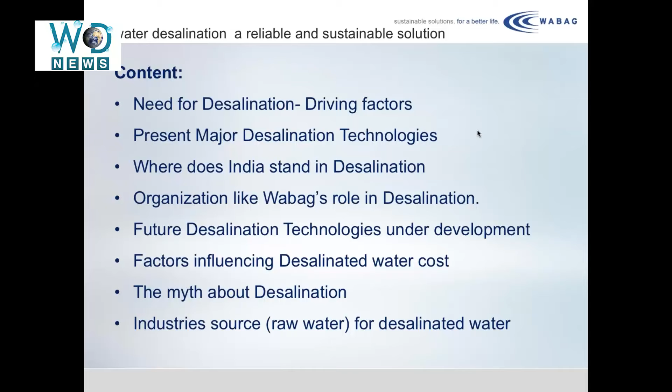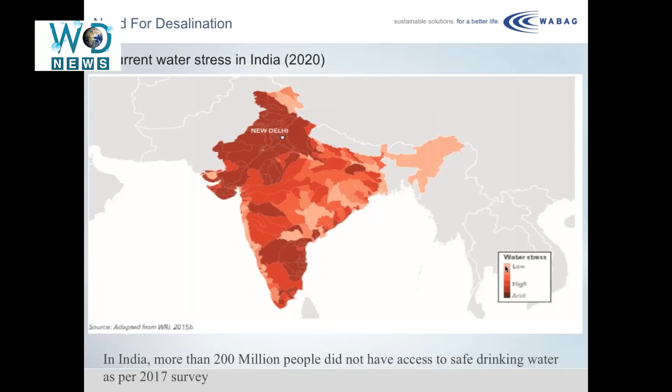More than 200 million people did not have access to safe drinking water by 2017 itself, which is now around 300 million. This picture shows the water stress in India in the current situation, that is 2020.

Factors driving the world towards seawater desalination include: limited freshwater resources, dwindling due to occupation and sharing with others; increasing contamination of freshwater sources due to pollution; increasing population consuming more water; migration of people to urban areas causing a lot of demand in major cities; and disputes on ownership of source water. For example, a dispute between India and Pakistan, or Mexico and USA, regarding water distribution from rivers is also increasing the need for desalination.

Higher disposable income of people in developing economies means they can afford to pay more for water even if good water is available at a higher price. This is also driving desalination. A high rate of industrial growth also increases the demand for desalinated water.

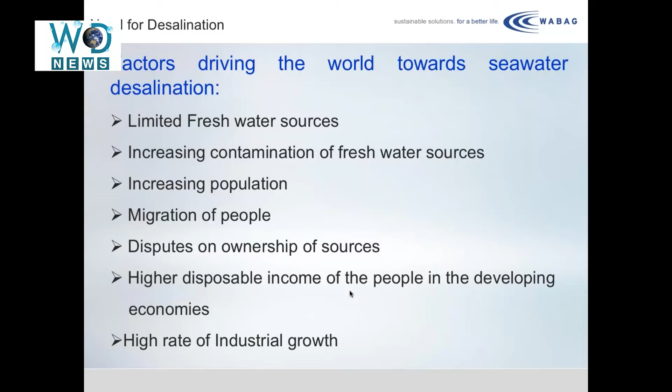The main factor that is driving the world towards seawater desalination is desalinated water costs going down continuously. In 1980, the water cost was around $3.2 per meter cube, that is 1,000 liters was costing around 3.2 US dollars, and it has come down gradually.

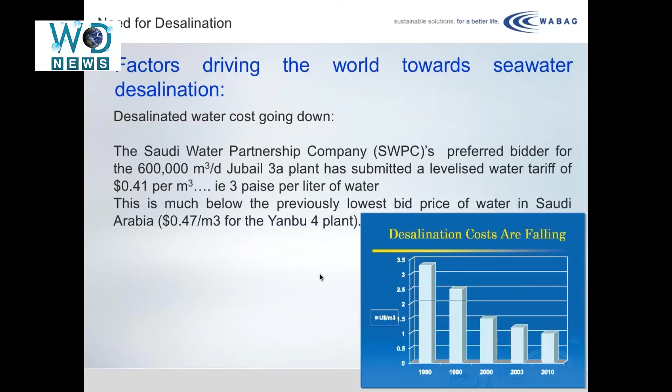Recent tender documents floated by Saudi water company SWPC brought down the water cost to $0.41 per meter cube, that is 3 paise per liter. Previously, 6 months back, another tender had the price at 0.47 US dollars per meter cube for the Yanbu 4 plant. But the Jubail 3A plant, for 600,000 meter cube per day capacity, brought the water cost down to 3 paise per liter. This is making desalination a more attractive solution.

About 50% of world population lives around cities close to the coastline, so the sea is easily accessible, and the ocean is a sustainable raw water source. About 71% of the earth's surface is water covered, and the ocean holds 96.5% of the earth's water. So this non-diminishing resource makes desalinated water easily accessible.

Tightening of regulation of groundwater extraction for industries is also driving desalination. People in all continents have already accepted this water for drinking and utility applications.

Desalination is now a mature technology that can supply desired quality of water reliably and at affordable price. Desired quality of water means, with desalination plants, we can even develop water very close to 2 microsiemens per centimeter, or produce utility water meeting whatever requirement. So the technology is now flexible, and we can have a desired quality of water, especially with respect to seawater reverse osmosis. Multiple modular units can be added in stages in order to improve the water quality.

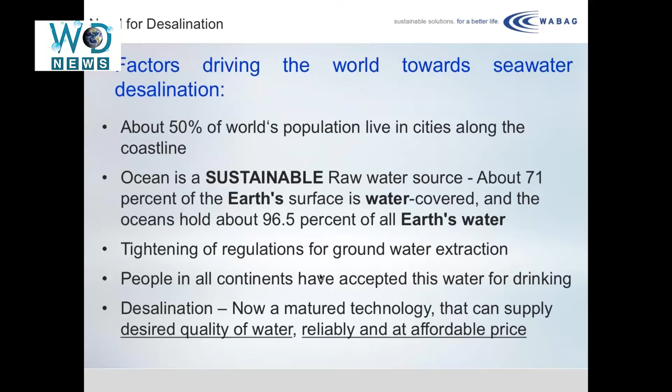Present major desalination technologies related to salinity of feed water are shown here. With the lowest feed water quality, you can go for ion exchange or electrodialysis process. Then there is brackish water RO, similar to the RO units used in kitchens. And there are seawater reverse osmosis plants designed for a TDS of water between 10,000 to 50,000. There is a limitation in the seawater reverse osmosis system because above 50,000, the pressure required increases above 85 bar. So membranes are not available except from one manufacturer which designs membranes up to 100 bars pressure, used in brine water conversions.

And the last is the distillation system, which is suitable for even higher TDS of water, and this was the most commonly used technology even 40-50 years back. But after the invention of membranes and making it more competitive, desalination technology with seawater reverse osmosis is taking over the thermal process.

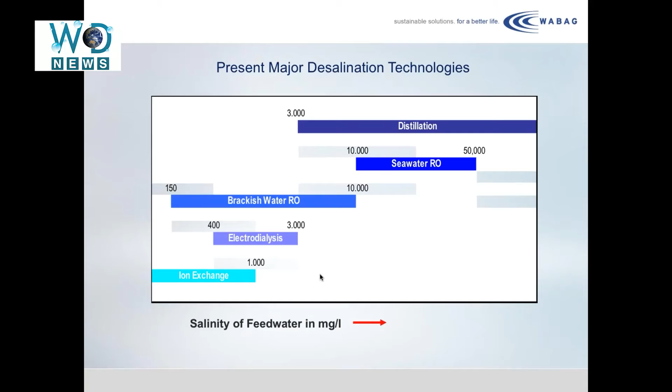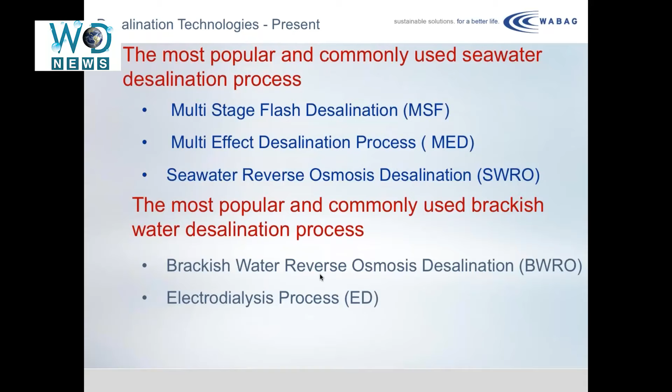The most popular processes in seawater desalination are the MSF process, which is multi-stage flash desalination, the second is multi-effect desalination process, and third is the seawater reverse osmosis desalination process. They are shortly called MSF, MED, and SWRO. For brackish water plants, which use well water or water with low TDS, brackish water reverse osmosis or electrodialysis process were very commonly used.

Any desalination plant has 5 major systems. One is the intake system, whose function is to bring water from the source up to the desalination plant. The second is the pretreatment system, whose function is to make this raw water suitable to be admitted into the RO system or any desalination system.

The pretreatment system assumes more importance in case of a reverse osmosis plant because membranes have pores which are very, very small, like 0.001 microns. So any particles going through can block the pores, even bacteria or viruses can block them, or biofouling and scaling can happen. So the pretreatment system assumes more importance in case of a seawater reverse osmosis plant.

Thermal plants are more rugged and can handle a less efficient pre-treatment system. Also, the pre-treatment system is important when the water quality is very bad. When the water quality is bad, the pre-treatment has to do extra work in order to remove all the impurities and make it suitable to be admitted into the RO plant, meeting the requirements of membrane suppliers.

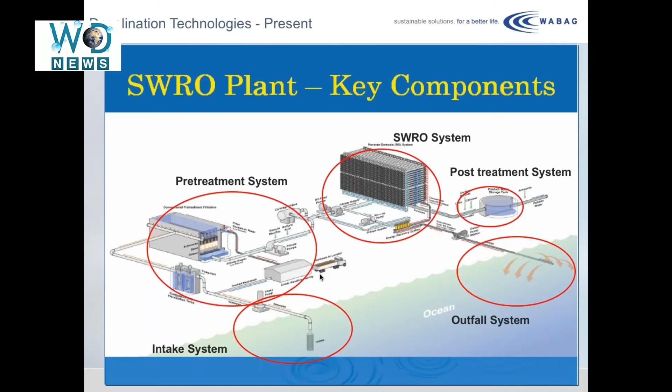The SWRO shown here can be replaced by any other desalination technology, such as the multi-stage flash process. The salient feature of this process is that the production of vapor is by means of flashing the seawater into evaporator zones, which are maintained at low pressure.

When water at a particular temperature, say from 90 to 110 degrees, is taken into an evaporator and allowed to flash at a lower pressure, in that vacuum the vapor generated is taken up and then condensed. This repeated flashing occurs in multiple stages by maintaining the succeeding stages at a lower pressure than the preceding stages. That means if the first stage has a pressure of X, the pressure in the next stage will be X minus something, and modern plants have up to 35 to 36 stages.

The more the number of stages, the higher the efficiency, or gain output ratio, and the lower the specific heat consumption. The water vapor generated is condensed by the water passing through the tubes, and in the process, the seawater passing through the tubes also gets heated. I'll explain the flow diagram in the next slide.

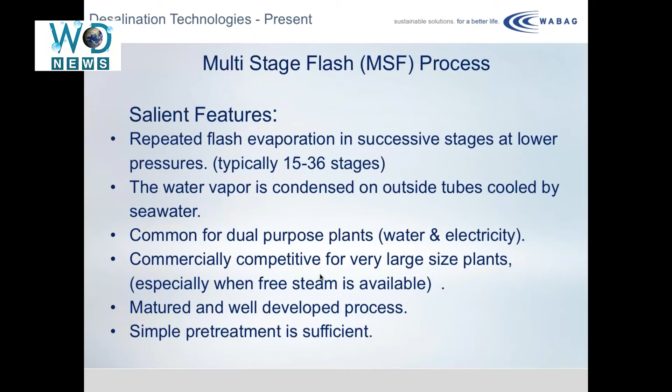We can see this is a simple flow diagram of a typical MSF plant. First, let us take the condenser. The feed water from the sea is pumped through the feed water pump, shown in the green lines, and taken through the tubes, which cool the vapor and condense it into water. This water is called distillate, and it is taken out. The water that is heated is taken up, and part of this water is drawn as makeup water, while most of the water is returned back to the sea. This is shown in the green colored portion.

The makeup water mixes with the recirculated brine and passes through various stages in the heating coils. These coils, in the process of cooling the vapors generated in different stages, produce vapor, condense the vapor, and in the process the water gets heated. In each stage it gains around 2 to 3 degrees centigrade, finally reaching the brine heater, where it is heated by steam coming from the thermal plant or standalone desalination plant, supplied by means of a boiler. The steam heats the water to a temperature we call the top brine temperature, normally in the range of 90 to 110 degrees, and in some plants up to 135 degrees. The condensed steam is collected and returned back to the boiler for further processing. It is a closed loop arrangement.

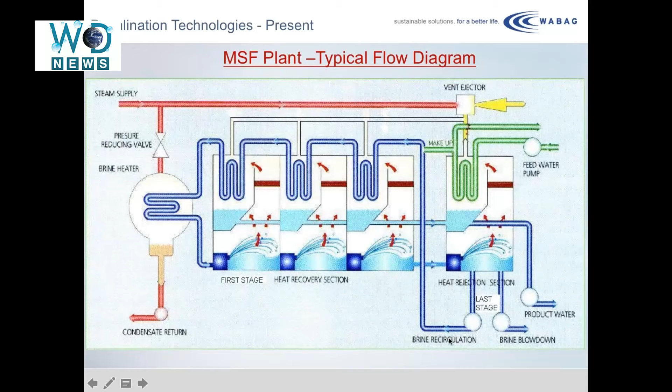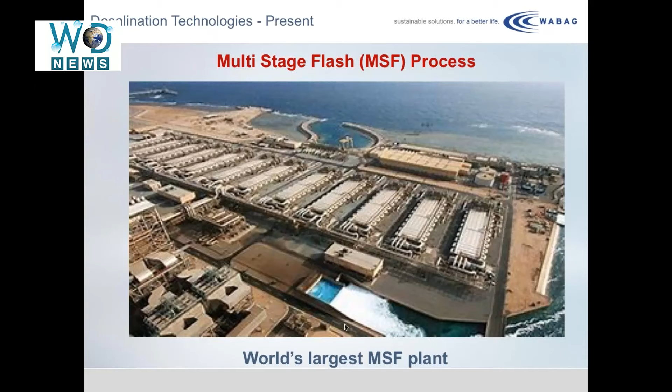This shows the Ras Al Khair plant, a 1 million meter cube plant, which I mentioned, where the MSF process generates 700,000 meter cube per day of water. It is in Saudi Arabia.

The next technology is the multi-effect desalination process. The salient feature here is that, in contrast to the MSF process where flashing generates the vapor, here film boiling generates the vapor required for desalination. In MED plants, the number of stages is less compared to MSF plants, generally 6 to 8 stages in modern high capacity plants. Initial plants had only 2 or 3 stages, where the efficiency of conversion was much lower, and the GOR and specific heat consumption were slightly higher. The more the stages, the better the efficiency of the plant.

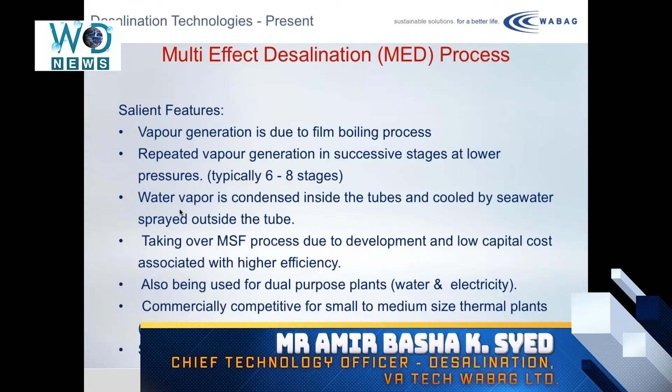The vapor generated is condensed inside the tube by spray of water coming out, cooling the seawater, which is sprayed outside the tubes. This process is gaining more importance because, price-wise and total cost-wise, as well as efficiency-wise, it is slightly better due to the lower number of stages. In small capacities up to 400,000, it is gradually replacing the MSF process.

It is also similar to the MSF process used in dual purpose plants, where waste heat from the power boilers or extraction steam from the power boilers supplies the heat for the brine heater, or to heat the seawater entering the system. This is commercially competitive for small capacity, but nowadays MED processes are available for 350,000 to 400,000 meter cube per day units, and it also requires only a simple pre-treatment process.

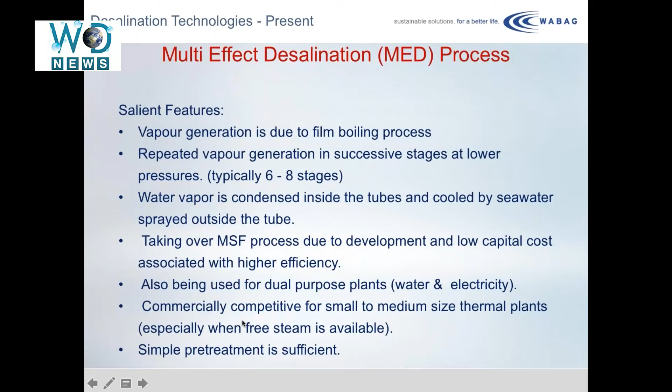The next slide shows the MED TVC, thermal vapor compression flow diagram. Here the steam enters and creates the vacuum required for the whole process. The vacuum is generated by means of an ejector system. The steam passes through the ejector, and then enters into the first evaporator stage.

It passes through the tubes. You can see the steam coming out, entering in as red, turning orange, and entering into the tubes. The vapor going inside is cooled by the seawater that is sprayed into the stage. During the process it cools the vapor and condenses it. This condensed water from the steam in the first stage is high purity water, and it can be returned back to the boilers for the process. During this evaporation, film boiling takes place over the tube surfaces, and vapor is generated.

The vapor generated goes to the next stage, shown by the red arrows. In the next stage, this vapor flows through the tubes, and water is sprayed externally to the tubes. In the process, new vapor is generated and goes to the next stage, while the vapor flowing inside the tube gets condensed and collected. The condensed water is collected and taken to the last stage as distillate, and the water sprayed is also collected at the bottom and taken to the last stage. Part of the water is recirculated for the process, and the remaining is blown down completely.

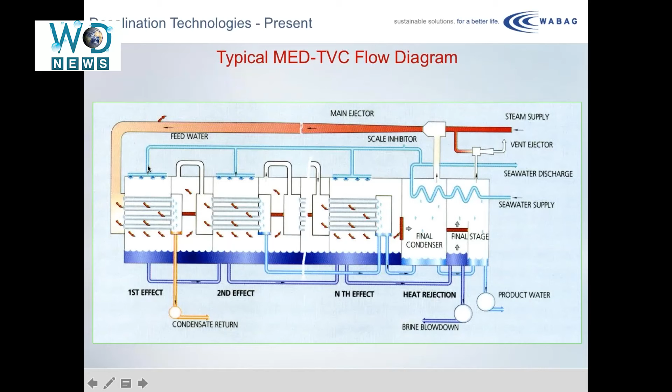The most commonly used process, which is gaining more importance in recent times, is seawater reverse osmosis. This is the cheapest desalination process for any standalone desalination plants.

In MSF and MED processes, if you convert the heat energy supplied into electrical energy, the power consumption will be very, very high, in the range of around 38 to 40 kilowatt hour per meter cube. But in seawater reverse osmosis plants, the specific power consumption has been brought down close to 3 to 3.2 kilowatt hour per meter cube, depending upon the simplicity of the process.

It's a cold process. Seawater reverse osmosis is a cold process, and uses pressure energy for desalination through reverse osmosis. This is very commercially competitive for all sizes of plants because it can be modular and added on to existing ones to increase capacity.

It is also a quick start and quick shutdown process, because in thermal processes you have to generate the vacuum, allowing steam or water to pass through the ejector to create the vacuum required in the system. Also, the heating rate and cooling rate in the boilers and other things are limited, which restricts the startup to a slow timing and a slow shutdown time for a thermal desalination system. Whereas in a reverse osmosis plant, the plant can be started within 15 minutes. An individual RO unit can reach full capacity easily, and shutdown can be done instantaneously just by a trip, then flushed and made ready for the next startup operation. So it is very suitable for quick startup and shutdown applications.

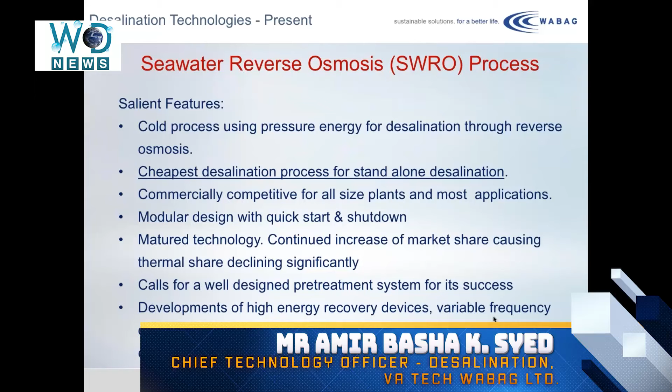This technology calls for a well-designed pretreatment system because of the fine pore size available in the membranes and because of the high recovery in this plant when compared to thermal plants. We go in for 40 to 50% recovery, and because of that, the scaling potential is also high, which needs pretreatment to be done properly.

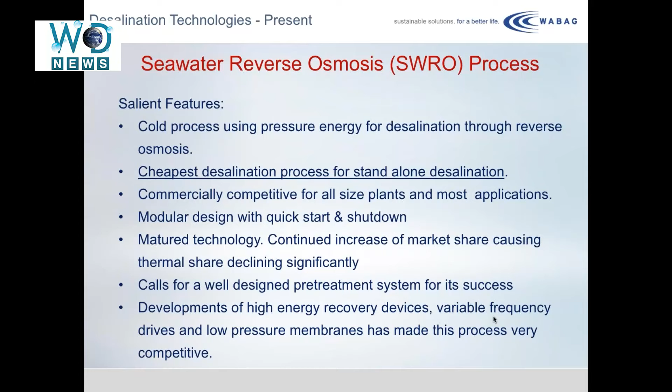Development of high energy recovery devices, variable frequency drives usage, and low pressure membranes has made this process a very competitive process.

Most of you will know what is osmosis and reverse osmosis. Just to touch upon osmosis: if you have a semi-permeable membrane with fresh water on one side and salt water on the other, water molecules from the fresh water pass through to dilute the salt water due to the concentration difference. Because of this, the water level rises on one side and goes down on the other, as part of the water molecules pass through. When the water level reaches a certain height, the process reaches equilibrium where exchange of water and salt takes place.

The level difference is called osmotic pressure. Only when you overcome this osmotic pressure in a reverse osmosis process can you produce fresh water by passing water molecules through the semi-permeable membrane. So in the osmotic process, due to the concentration difference, water molecules pass through the semi-permeable membrane and dilute the salt water. In reverse osmosis, you apply a pressure much higher than the osmotic pressure to force water molecules to pass through the pores in the semi-permeable membrane and reach the other side to produce low salinity water.

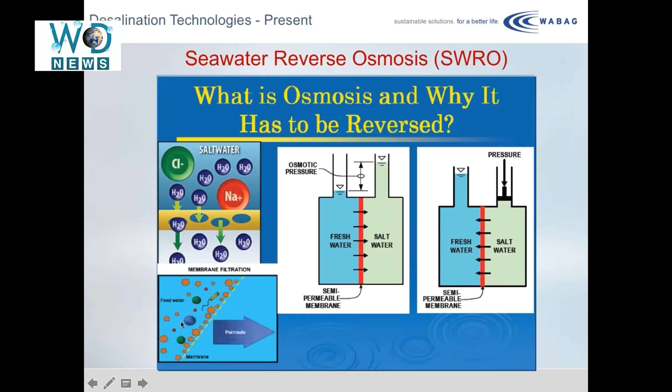This is a simple flow diagram of a seawater reverse osmosis system. Seawater is taken into the feed tank, then pumped through a feed pump and passed through a multimedia filter. This multimedia filter is a pretreatment segment which can be replaced.

If the quality of feed water received is bad, with more suspended particles, then we go in for a lamella clarifier. If it has algae or some amount of oil, or the TOC level is slightly higher, we prefer to use a dissolved air flotation system. But if the water is within the allowable range of suspended particles, we go in for a multimedia filter.

In recent times, the multimedia filter is getting partially replaced in some sophisticated plants with an ultrafiltration or microfiltration system, which is a membrane-based pretreatment system with pores of 0.05 or less. Because of this, suspended particles are removed efficiently, and you can go in for slightly higher recovery in the RO plant, since the quality of feed water from these membrane filtration systems is much superior to multimedia filters and lamella clarifiers.

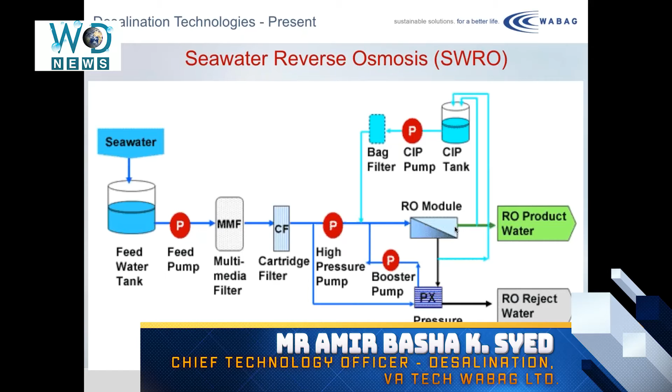The cleaning cycle is generally 2 to 6 months, depending upon the efficiency of the pretreatment system. If the pretreatment system is really good, the cleaning requirement is sometimes even once in a year. But if the efficiency and effectiveness of the pretreatment system is less, some plants are cleaning once in 10 days, once in 15 days also.

So the efficiency of operation of the RO system and the longevity of the membrane life depends on the efficiency of your pretreatment system, because when you do more CIP, the membranes get lesser salt rejection, and because of that salt passage increases through the membrane, salinity level increases, so you are forced to replace the membrane. So the life of the membranes comes down if the pretreatment efficiency is low.

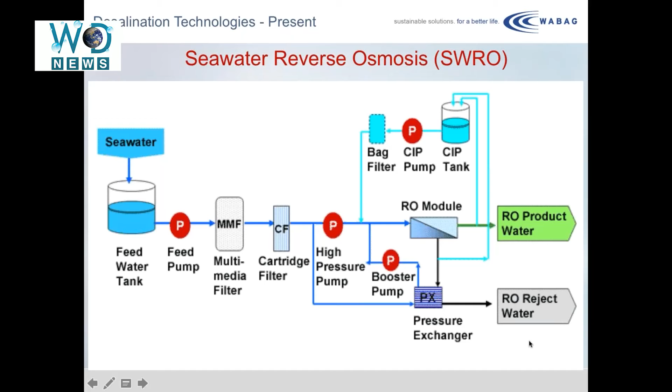This is a typical spiral wound membrane sectional view. You can see this membrane has a polyamide layer. This is the effective layer which has a pore size of 0.001 microns and which rejects monovalent, divalent, and trivalent ions. There is a polysulfone layer and a polyester base layer, which are supporting layers to give strength to this polyamide layer. So this is a typical membrane sheet.

This sheet of membrane is used and rolled as a spiral wound to make spiral wound membranes.

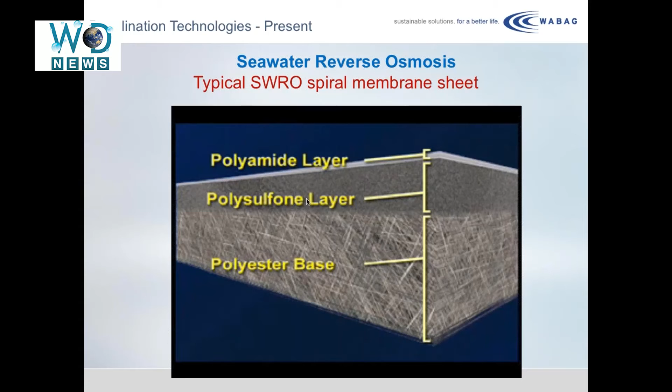This is a typical reverse osmosis membrane. You can see the raw water enters from one end and leaves at the other end. While it is passing through, these are the sheets. You can see the brown color sheets are the membrane sheets. In between, they are glued together. The two sheets are glued together as a pouch, and it has got a spacer, that is a permeate spacer, in between for the water to get collected and flow gradually to the center pipe and get collected.

So multiple pouches of RO membranes are glued together and rolled as a membrane sheet here in the spiral form. That is the reason why it is called spiral wound membranes.

You can see this is the permeate tube. The yellow line is a permeate tube which collects the permeate that is collected in the pouches of the membranes, and then it is passed to the next one.

Generally, the membranes are arranged with 6 or 7 membranes in one pressure vessel. As the feed water flows from one end to the other, part of the low TDS water gets separated and collected in the permeate tube, so the concentration of the remaining water continuously increases. From the first membrane to the second membrane, the salinity of the feed water increases, so by the last membrane it reaches maximum salinity. The permeate tubes are interconnected through small connecting pieces, and it is collected at the end of the RO pressure vessels in a header.

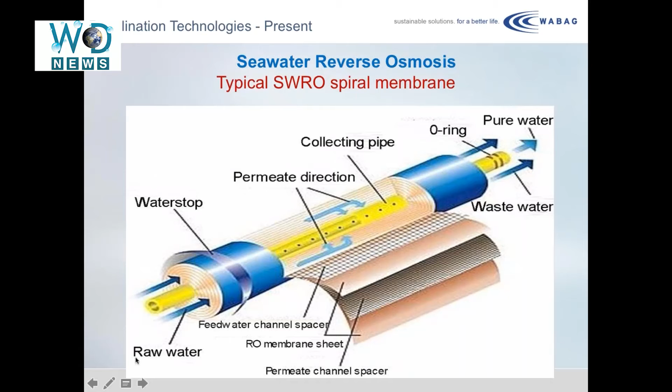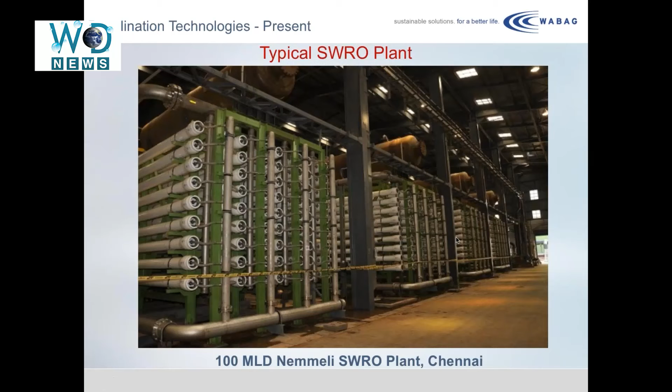This is the typical seawater reverse osmosis plant. It is a 100 MLD Nemmeli desalination plant view shown here.

The other process in brackish water technology is the electrodialysis process. This is the process that is also used in dialysis systems. It is an electrochemical separation process in which ions are transferred through ion exchange membranes by means of direct current - DC current is involved in this. The process uses an electrical driving force to transfer positively charged ions from the source water to the cathode, and negatively charged ions to the anode.

So this is the time at which you need to recharge it, or perform a process reversal in case of the electrodialysis process, in order to remove these ions that are collected in the anodes and cathodes.

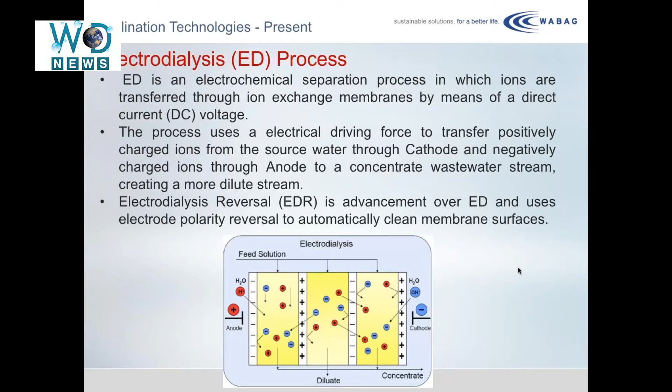So the electrodialysis reversal process is an advancement over the electrodialysis process. But there, instead of using a flushing cycle to remove it, you use a reversal of electrodes to reject the collected positive and negative charge ions, and then they form a brine which is removed and rejected.

How do we increase the availability and reliability in SWRO plants? This is very important in order to improve the availability and reliability.

What we do is select a proper seawater intake location, because this assumes importance since the pretreatment system is decided based on the quality of seawater. First you have to do an extensive survey of seawater in that area to locate the intake location. You also have to do the bathymetry, the lithology of the area, and look at the variation in water quality, especially if it's close to river discharges - variation in TSS, algae carryover, and many other things. So a study of seawater quality, and the various other aspects I mentioned, are very important in deciding the location of the intake.

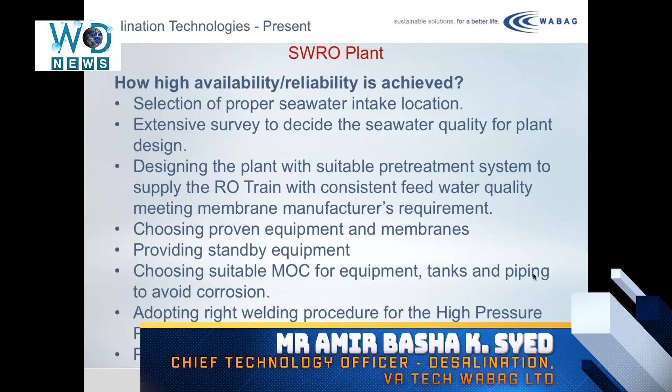Choosing proven equipments and proven membranes also increases the availability and reliability of the plant. Providing standby equipments enables the plant operation during the maintenance of the equipments, and this increases the availability of the plant. Choosing the material of construction of the equipment, tanks and piping to avoid corrosion is also an important factor.

For example, high pressure pipings and brine pipings are nowadays made with super duplex stainless steel. All low pressure pipings and low pressure equipment are made up of non-metals, especially FRP, PVC, CPVC, or HDPE, which are generally used.

Adopting the right welding procedure for high pressure pipe is very much essential, because improper welding process and heat treatment process results in crevice and pitting corrosion in the high pressure piping. And when the corrosion starts, it requires frequent shutdown for attending to the pipes.

So to increase the reliability, all the pipings have to be properly welded and treated. Predictive and preventive maintenance is another important factor which also increases the reliability and availability of the plant.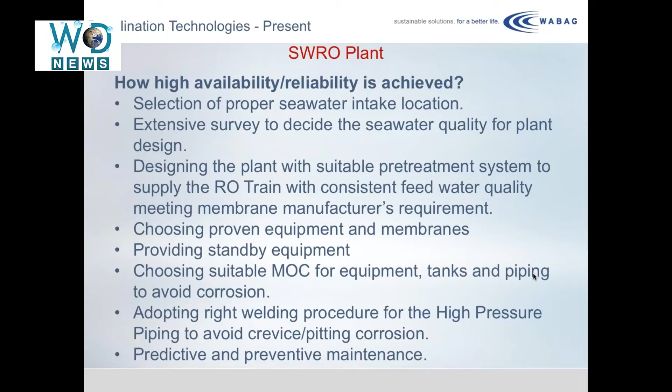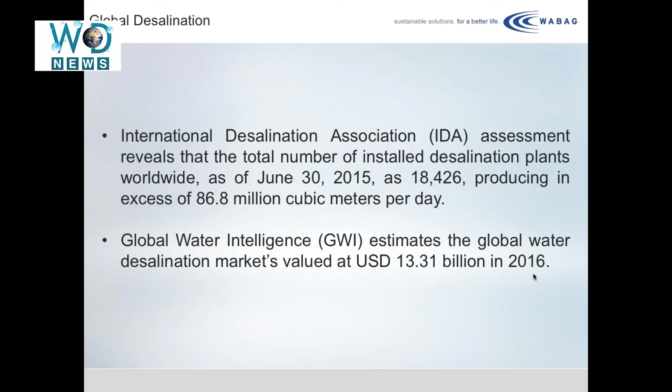Where does India stand in desalination when compared to the global desalination? International Desalination Association reveals that as per their assessment in 2015, 18,426 desalination plants are there, producing 86.8 million cubic meters per day, which has almost increased by 30% by 2020. The Global Water Intelligence estimates the global water desalination market value is 13.31 billion US dollars in 2016.

But India has taken a leap now by going in for more desalination plants. Chennai is almost acting like a Detroit of desalination, and it has already got 2 into 100 MLD plants. One more 150 MLD desalination plant is already coming up in Nemmeli plant, and another 400 MLD plant tender documents are under preparation and will be shortly released. So if this is ready, the Nemmeli Desal in Chennai alone will have 750,000 cubic meters per day of desalination plants, which will totally take care of the water scarcity even during the summer if the rains fail.

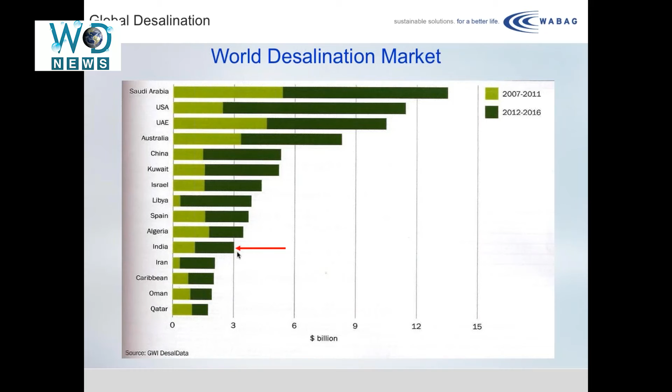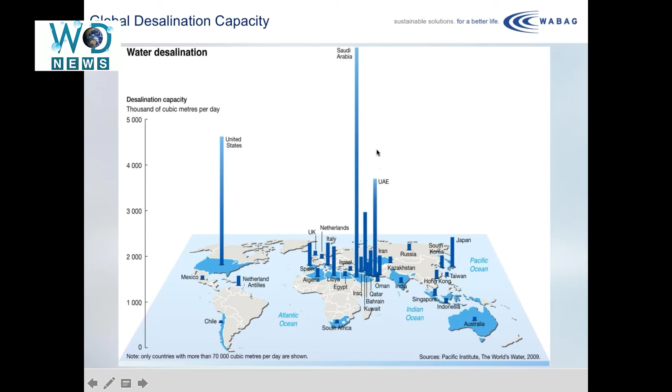This shows the various installed capacities in different zones or different countries. Saudi Arabia leads it, with installed capacity close to around 8.5 million cubic meters per day, and other countries are trying to catch up. UAE has also added a lot of capacity in recent times.

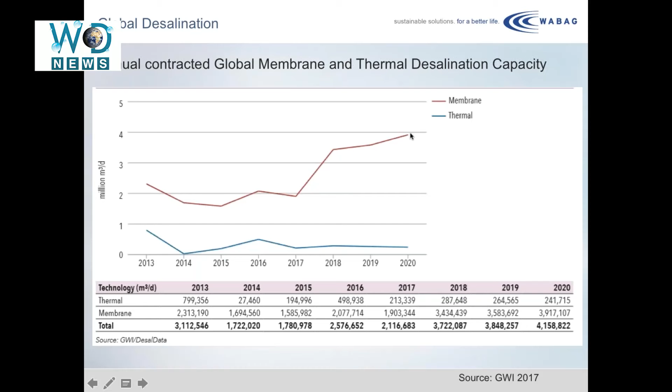Second, the inland plants should have an area for brine disposal. Since reverse osmosis seawater plants are close to the coastal region, the brine can be easily disposed to the sea. Whereas brackish water desalination plants are mostly inland, and the disposal of brine becomes a big challenge. So in many big plants in Saudi Arabia, like those in Salbukh and Buwaib, which are around 60,000 meter cube per day capacity, they have built big evaporation ponds, around 1.5 kilometers by 2 kilometers in dimension, to evaporate the brine and dispose of it.

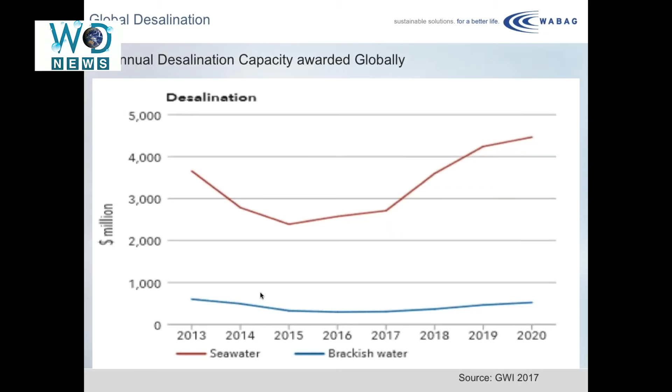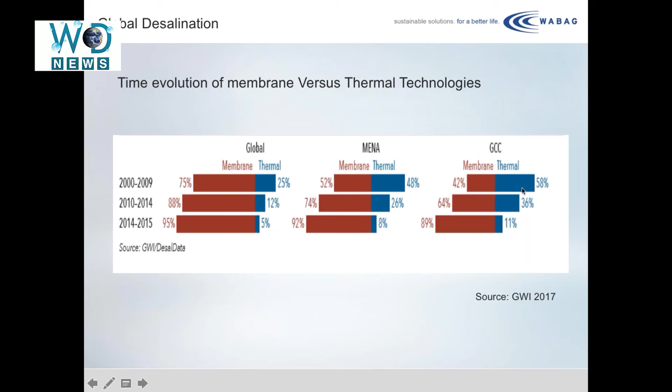This shows the comparison of thermal versus membrane process. You can see in GCC countries, on the right side extreme, the contribution to thermal plants is much more compared to other areas. This is because the earlier plants erected in the Middle East were all thermal desalination plants, and later additions in recent times are due to membrane desalination. Globally it is only 5%, whereas in GCC countries it is still 11%. The blue segment indicates the thermal process, and the maroon segment indicates the membrane process.

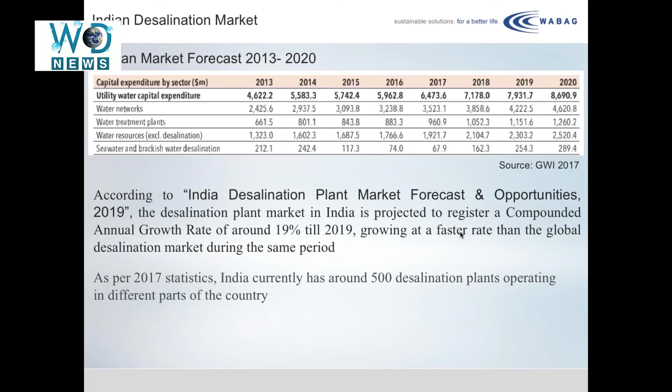Indian desalination plant market forecast and opportunities in 2019 predicted that the growth rate will be around 19% and will increase further. As per statistics in 2017, India had around 500 desalination plants of considerable capacity, close to more than 1,000 meter cube per day, operating in different parts of the country. But recently there are a lot of developments. Even Gujarat and Maharashtra are trying to bring in more desalination plants. Some desalination plant talks are going on the east coast of Tamil Nadu, as well as in the Andhra state.

Organization like WABAG's role in desalination - what do we expect from such an organization? One is continuous R&D efforts to be made in order to reduce the capital cost of the plant, and also design optimization to be done in order to bring down the operation cost.

Reduce the energy consumption of the process by going in for more advanced energy recovery processes, and using VFD plus low pressure membranes to reduce energy consumption. Minimize other operating costs in order to reduce the lifetime water cost. Extend the desalination plant life so that add-on expenses on life extensions can be reduced. Incorporate innovative technologies that reduce the lifetime water cost of the plant and make it more competitive, and develop technologies for byproducts that have value additions. By doing all these things, we can make desalination still more attractive.

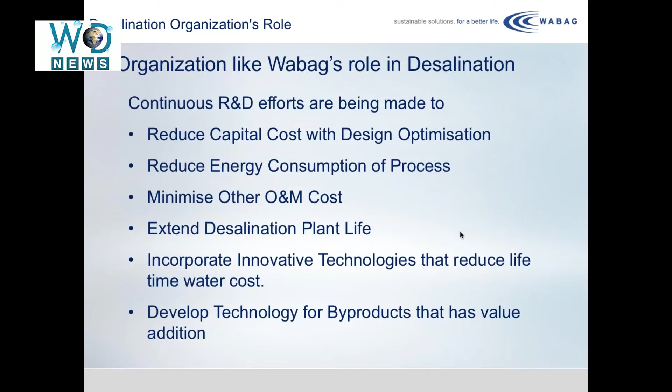WABAG believes in desalination as an alternative, reliable, feasible, sustainable source of water. WABAG is able to offer optimized, tailor-made solutions for both the production of drinking water as well as industrial applications, using saline water as the source, or in case of industries, using even the effluent from the industries for generating the feed water requirement of the plant.

Backed by in-house R&D centers in Austria, India, and Switzerland, a lot of developments have been made in WABAG. Cooperation with universities and development partners goes a long way with WABAG's quest for innovations.

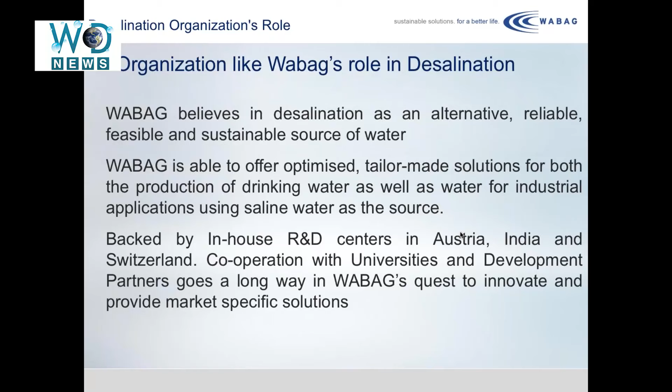Future desalination technologies which are under development - I have tried to explain only a few. There are a lot of developments going on. The more important ones gaining momentum are listed in this presentation: forward osmosis process, membrane distillation process, capacitive deionization process, humidification-dehumidification process, solar desalination, and new RO membrane developments which are promising.

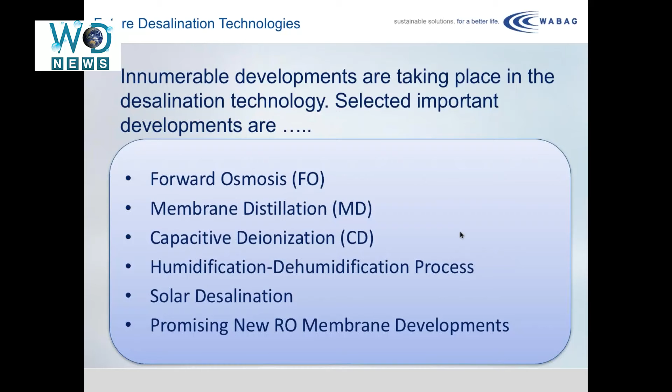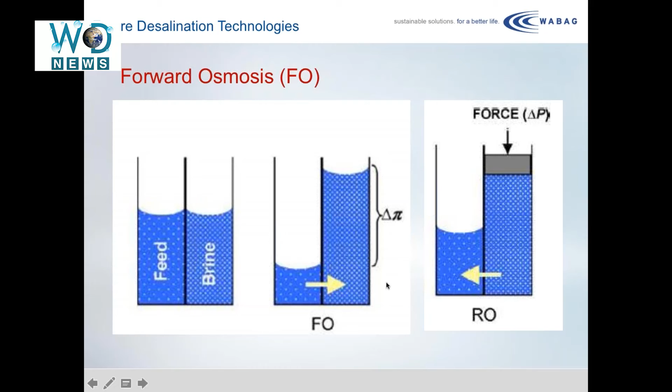Regarding osmosis and reverse osmosis, I explained earlier. Osmosis is nothing but forward osmosis, and reverse osmosis is applied force which is more than the osmotic pressure in order to have the water molecules separated. So the normal osmotic process is the forward osmosis process, which is under development. This uses a semi-permeable membrane to separate salt from the water, similar to the RO process. Forward osmosis uses the osmotic pressure gradient instead of the hydraulic pressure gradient used in RO, to create the driving force for water transport through the membranes.

As I explained, in the RO process we raise the pressure to around 55 to 70 bar depending upon the salinity of the water, to push the water molecule through the pores. Whereas in the forward osmosis process, the osmotic gradient between the two fluids on either side of the membrane acts as the driving force for separating the pure water.

Energy required is very less to drive the water flux, because the driving force is the difference in gradients in the salinity levels. Forward osmosis is an innovative membrane-based technology, and it has got potential to reduce the cost and environmental impacts of desalination.

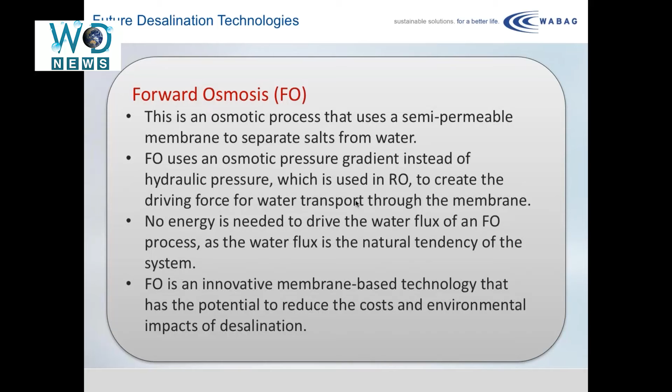There's a lot of research going on in this process. There are plants which have been built to a capacity of 100 to 200 meter cube per day, and they are running successfully, and research is continuing in this forward osmosis process.

This is the real heart of the system, which is the forward osmosis system. Saline water is sent through one end and collected on the other end as brine, and there is a draw solution which has got high concentration compared to this saline water. Because of the difference in salinity, pure water molecules try to pass through the membrane and get into the draw solution to dilute it.

This diluted draw solution is taken through a tank, and there is a separation process where the pure water is separated from the draw solution and collected separately, and the draw solution is circulated back.

The important aspects in forward osmosis are the draw solution and the membranes. The draw solution is very important because it should not use any toxic material, so that toxic carryover into the pure water does not affect the downstream process or usage. The membrane also has to be developed so that it is more matured and can operate for longer hours without much fouling or other problems.

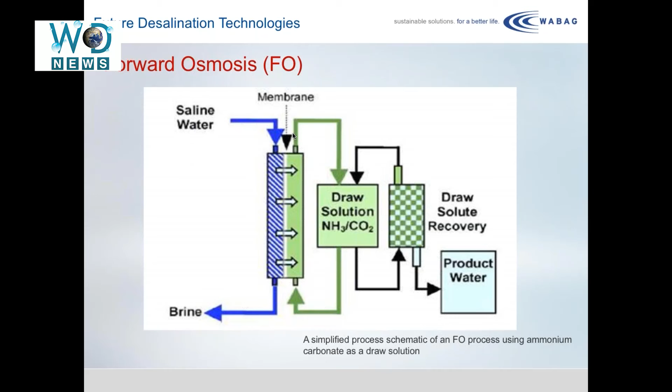There is also a process called osmotic assisted process, in which they go up to 250,000 ppm of water, concentrating it before the evaporation process to form salt.

Membrane distillation process combines membrane technology with the evaporation process in a single unit. The appeal of the MD process is that it requires less pressure, closer to only 1.5 or 2 bar, and relatively lesser feed temperature in the range of 70 to 90 degrees centigrade.

To increase thermal efficiency, conventional processes have gone in for a top brine temperature of 110 to 130 degrees, so the scaling potential increases when recovery increases in thermal processes. Whereas in MD processes, they are able to use waste heat or solar heat in order to generate the temperature in the seawater, and then we can do desalination.

Water vapor is transported through the pores of the membrane, which is generally hydrophobic in nature, using the temperature difference across the membrane. At one end, hot water is passed through, so the vapor passes through the pores in the hydrophobic membrane of the MD process and reaches the other side where it is cooled and condensed. Vapor generation increases with more temperature difference, and the membrane allows water vapor to penetrate the hydrophobic surface while repelling the liquid.

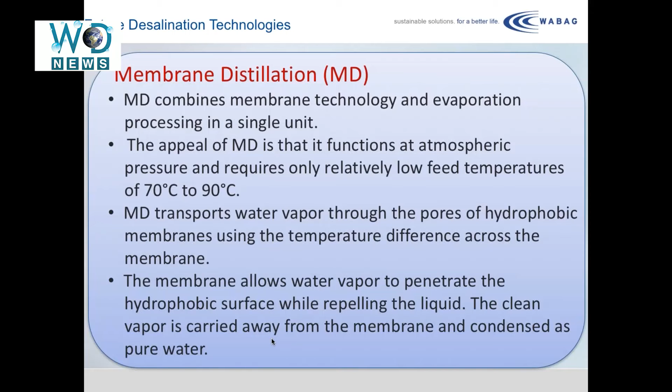The clean vapor is carried away from the membrane and is condensed as pure water. The carrier can be air, or some other process by which the vapor is carried into the area where it is condensed and water can be obtained from there.

An air gap, water vapor, or vacuum can be used in order to generate more amount of vapor.

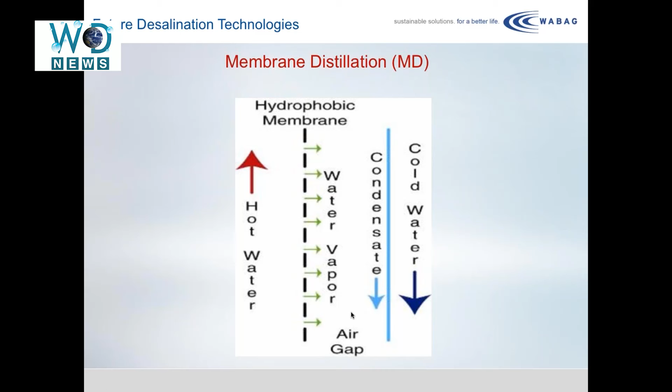The next process is capacitive deionization process. This is a low pressure, non-membrane desalination technology. It uses electrostatic forces to remove dissolved ions from the solution. The saline water is passed through a pair of electrodes which has a potential difference of around 1.2 volts.

When compared to the ED process, the voltage applied is much lower in this CD process. The electrodes consist of a porous carbon aerogel which has a very high specific surface area. This is very important in case of CD - the specific surface area should be high, and it has to have very low electrical resistivity.

Ions are adsorbed on the electrodes of opposing charges in a semi-batch process. The feed water is allowed to pass through, and the positive and negative ions are collected on the respective electrodes, and when the water passes through, leaving alone all the ions, the low salinity water is collected. But after a process time, the batch ends, and the electrodes are saturated with the ions.

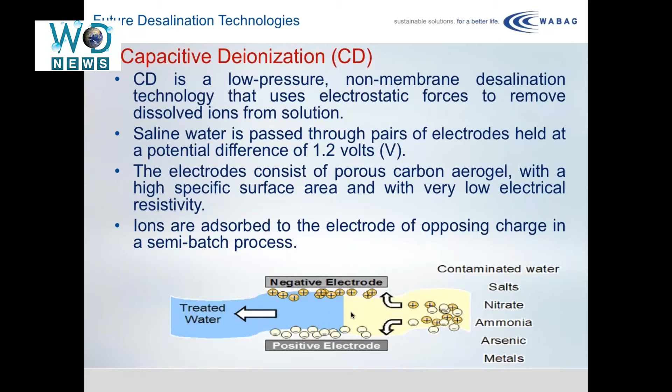And this has got a very good effect with respect to low salinity water with the brackish water with the silica and other things, because electrodes are not affected by this silica.

To regenerate CD, the applied potential is removed and the ions attached to the electrodes are released and flushed out of the system. Flushing of the cell using a small quantity of product water generates a concentrated stream, which is called brine.

Unlike the ion exchange process, no additional chemicals are required for regeneration of the electrosorbent in this system.

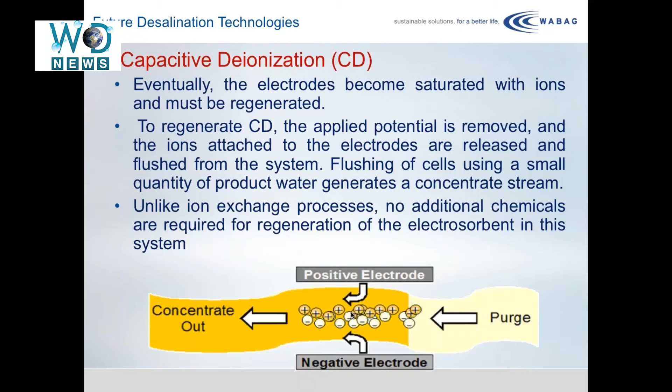Humidification dehumidification process. This mimics a natural water cycle to desalinate the water. Natural water cycle is nothing but seawater getting evaporated, carried out, and then it is cooled, and then rain falls, and the rain comes back through rivers and goes back into the sea. This is the natural cycle, and this humidification dehumidification process mimics that process.

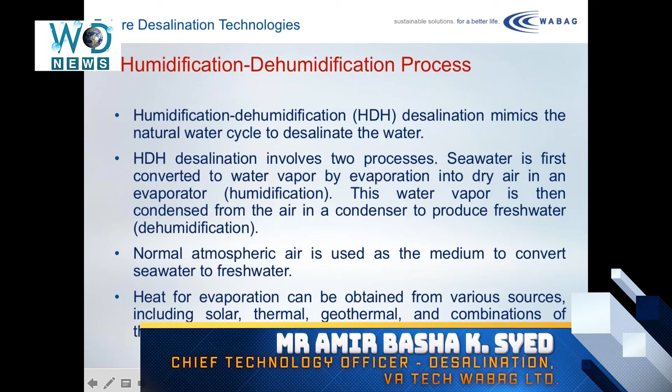Seawater is first converted into vapor by evaporation in dry air, and the dry air carries the water vapor into the next segment. This water vapor is then condensed from the air in a condenser to produce fresh water. So where the evaporation takes place in the dry air, it is called humidification, and where the condensation takes place, it is dehumidification. Normal atmospheric air is used as the medium to carry the vapor generated, converting seawater into fresh water.

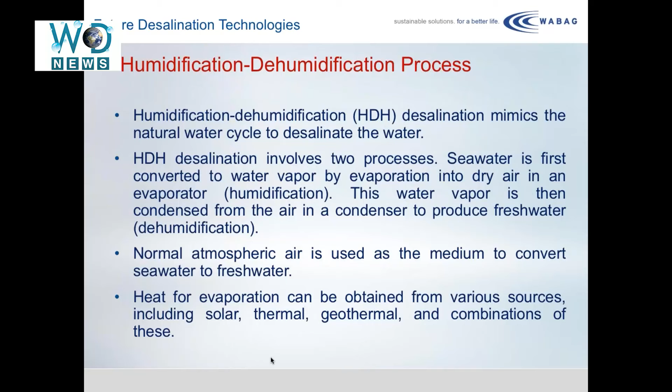Heat for evaporation can be obtained from various sources, including solar, thermal, geothermal, and a combination of all these three.

This is a simple schematic diagram of a humidification dehumidification process. Dry air is allowed to pass through a solar collector where heat is applied to it, and seawater is evaporated, and the evaporated seawater along with the vapor goes down, and the vapor is carried and passed on to the dehumidification chamber, where cold water is passed through to condense that water, and the condensate leaves out and the air also comes out.

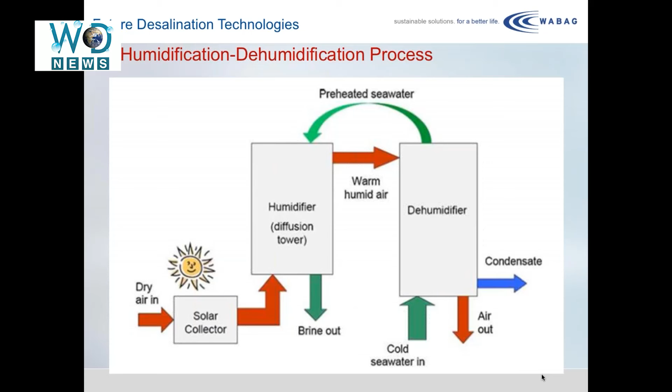So it is dry air which carries the vapor and condenses at the dehumidifier and then is sent out. So it's a simple process. The only advantage of this system is it can use waste heat as well as solar heat in generation of water. And this is also in development in many research laboratories.

Solar dome desalination is another attractive desalination technology that is coming up. It uses concentrated solar energy by strategically arranging banks of mirrors, which speeds up the natural process of evaporation within the dome, a greenhouse structure.

The seawater flows into the dome by means of gravity, and it enters the glass aqueduct in the dome, where solar reflections from the various mirrors concentrate and heat this, generating vapor. The dense steam produced falls as a tropical rainstorm within the dome as clean and pure water.

This water is then collected and piped to the reservoir. This process is under development, and they say the water produced is much cheaper because it uses solar energy, but the capital cost for installation is quite high.

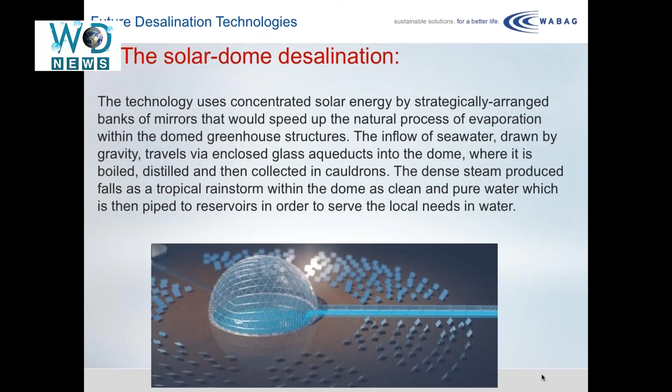Solar desalination with solar power - Saudi Arabia is building a solar desalination plant on its east coast. It will be using concentrated photovoltaic cells in order to produce electricity, and that electricity will be used in a reverse osmosis plant to produce water.

Marubeni has recently bid 0.0157 per kilowatt hour for an 800 megawatt photovoltaic plant in Qatar, which in Indian equivalent is 1.13 rupees per kilowatt hour.

In a Nemmeli Desalination Plant, a seawater reverse osmosis plant of 100 mld capacity, electricity contributes to 70% of the plant O&M cost. In Tamil Nadu, the electricity cost is around 6.35 rupees per kilowatt hour. Assuming the power cost goes down from 6.35 to 1.13, that means a reduction of 82% in the power cost, and how attractive the water cost will be.

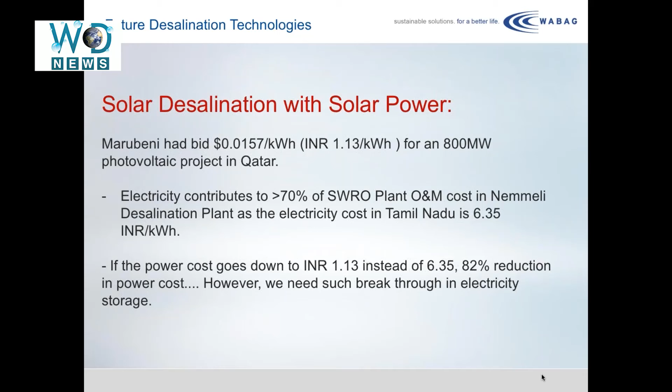This will reduce the production cost because the flux is increased through the membranes with the same applied pressure. Aquaporin membranes mimic natural roots which absorb water from the soil. The required water for the plant is obtained through roots, and the roots absorb water from the soil. The same mechanism is mimicked in these aquaporin membranes, and these three membrane types are under development and in advanced stages.

I think within another 2-3 years, commercial models may be coming out in the market.

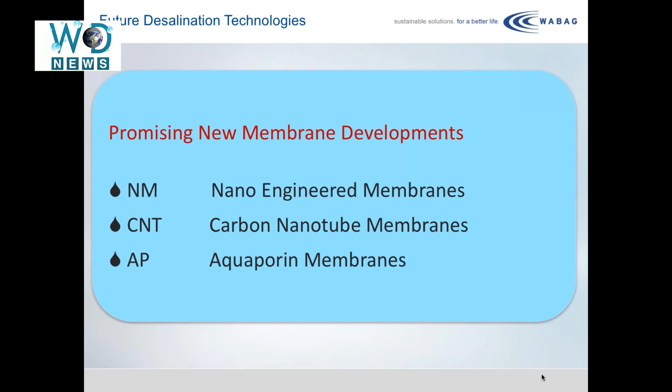Factors influencing the desalinated water cost: one is plant size. When the size of the plant becomes bigger, the efficiency of the equipment used is very high. For example, in a small capacity plant, pump efficiency is 70 to 75%, while in high capacity plants, we get efficiency in the range of 80 to 88%, making lesser specific pump consumption. Also, economy of size always helps bring down the cost per cubic meter of the plant constructed.

Feed water salinity and quality: the higher the salinity of feed water, the more pressure is required for recovery of water from seawater, and the recovery is also restricted. When salinity is high, recovery is restricted to, for example, 40 to 42%, whereas when salinity is in the range of 32,000 ppm, it can go up to 50-55% recovery. So for the same installed capacity, the cost of the plant will be much lesser.

Also the quality of the water matters. For example, if you need potable water quality of 500 ppm, the cost of the plant will be much lesser compared to going in for potable water quality of 100 ppm. So the quality of potable water or the end product also decides the cost of the plant.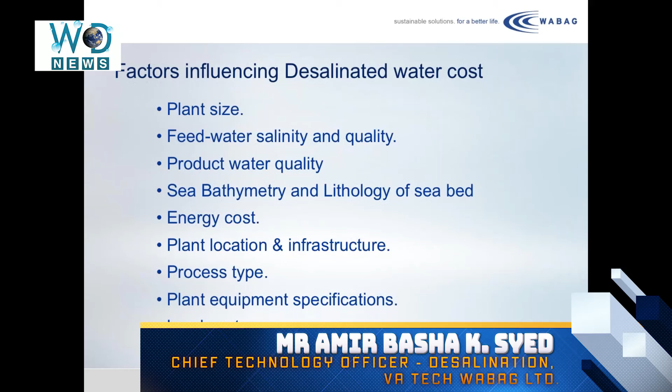So most modern plants are aiming at a life of around 25 to 30 years, and they go in for super duplex stainless steel for high pressure applications, valves and pumps. For low pressure applications they go in for non-metallic pipes like high density polyethylene, GRP or FRP. And for low pressure pumps of low capacities and chemical cleaning systems, they go in for fiberglass type pumps or PP pumps. So by choosing suitable specifications for the materials, the cost can be optimized and the life of the plant can be improved by avoiding corrosion.

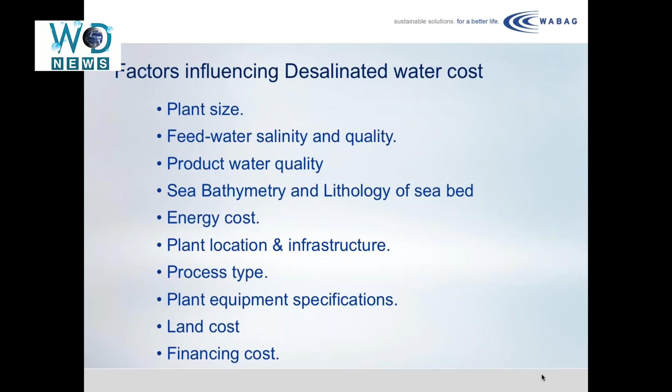Then the financial cost also plays a role in the price of the water that is produced.

There are certain myths about desalination plants which I wanted to clarify here. The most important is that desalination affects marine life. The main concern is that the brine is discharged into the sea, and due to its high salt concentration, it can affect marine life.

In case of thermal plants, there is also a slight amount of thermal heat from the condenser when the hot water is discharged, around 3 to 4 degrees centigrade more than the seawater temperature. This also gives a concern to environmentalists.

Actually, in modern plants the discharge is let deep into the sea through special diffuser arrangements, such that the discharge is diluted in a radius of around 30 to 40 meters from the diffuser point. After dilution, the salinity difference between the brine discharge and the seawater is less than 5% in most plants.

Environmental agencies keep a constant watch on these water discharges, and there is a requirement that plants collect samples in certain zones specified by the environmental agencies, test them with a third party laboratory, and send the reports to them for further renewals.

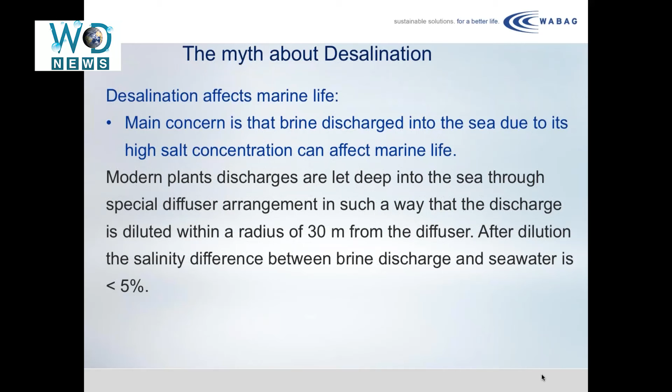The second myth is that desalinated water cost is very high. In the last 30 years, several inventions in energy recovery devices have reduced the power consumption from 8.5 kilowatt hour per meter cube to 3.2 kilowatt hour per meter cube.

In the initial days when seawater reverse osmosis plants were built, we did not have energy recovery devices, and the recovery of the plant was only 30%. Modern plants have a recovery of around 47 to 50%. Because of that, the specific power consumption was in the range of 8.5 to even 9 kilowatt hour per meter cube, because 70% of the brine was discharged at full pressure, and the energy was killed in the brine valve and then sent to the sea.

Later, reverse running pumps were introduced in the brine in order to recover at least 50% of the brine energy. Then came the development of the Pelton wheel, which had energy recovery efficiency of around 80 to 85%. That reduced the specific power consumption to 4.5 kilowatt hour per meter cube, and the recovery also simultaneously increased to 40%.

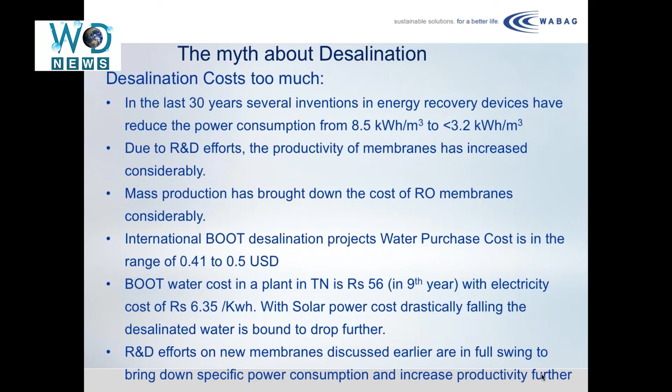Another myth about desalination is that desalinated water does not have minerals and is not good for health. Many people confuse seawater desalination with house RO units. House RO units take feed water from either well or municipal water, where the TDS is much lower, and the RO membranes reject approximately 90% of the salt from it. Because of that, the salt level available in kitchen RO units is much lower.

Whereas a seawater reverse osmosis plant can be designed for any required quality. Generally, municipal SWRO plants are designed to meet WHO (World Health Organization) and IS 10500 standards in India. They produce water with total dissolved solids in the range of 250 to 500 milligrams per liter, containing all the minerals present in seawater - calcium, magnesium, sodium, potassium, carbonates, bicarbonates, everything available in seawater, in little concentration. So whatever minerals are required for the body are provided by this potable water generated from seawater reverse osmosis plants.

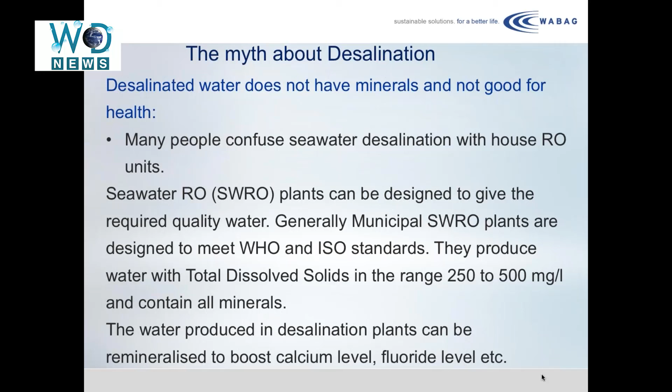Desalination is a failure and the plant will not be reliable - this is a myth that exists not just in the Middle East or Western region, but in India too, some people have that notion, which is not true. The whole of the Middle East countries' utility water demand is successfully met with desalinated water over decades. The availability of desalination plants is as high as 97%, making them more reliable.

SWRO plants can be started in a short time and also can be stopped when required, so they can be operated on a need basis. Expertise is available in India to build and operate desalination plants, with companies like Wabag.

So it is totally a wrong myth that desalination plants fail, because in the Middle East there are plants operating for more than 35 years, and they have gone in for life extension to increase the life by another 10 years. So desalination plants are going to stay here, and they are the need of the hour in order to have a reliable and feasible water supply at cheap rates.

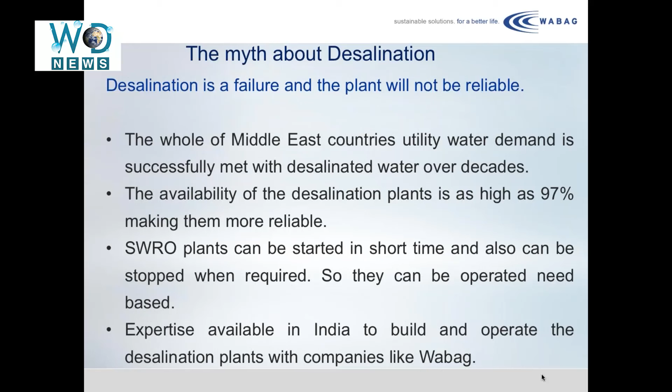Industries can source water, the raw water required for producing desalinated water, from different sources. The raw water for desalination can be sourced from the sea, from process effluents of its own industry, or it can collect water from municipal waste and desalinate it and reuse it, as in the case of tertiary treatment plants. It can also use brackish water or backwaters to produce desalinated water for the industries.

In Gujarat, there are many plants coming up which are going to use the backwaters. Reliance has successfully commissioned plants using its own effluent to produce the desalinated water required for the industry. Beach wells on the shore can also supply filtered water required for desalination. Only thing, it needs clearance from the environmental agencies.

From any type of raw water provided, desalinated water can be designed and produced with the TDS varying between 5 milligrams per liter to whatever TDS is required. For inland plants, evaporation ponds can solve the brine disposal issues.

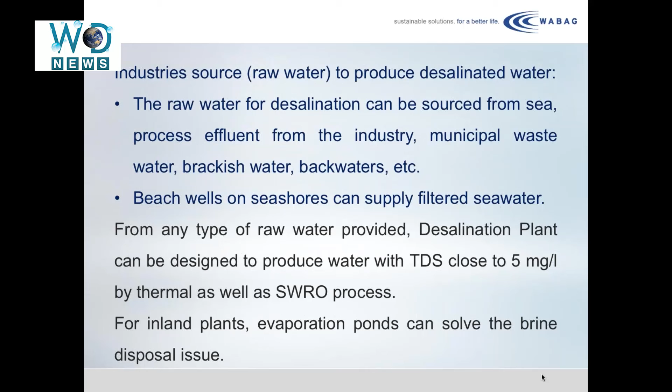I would like to conclude stating that desalination is an attractive solution and it gives a reliable and effective way of handling the scarcity of water at a reasonable price. However, the order of preference in which water can be obtained, the cheapest source, is natural water, precipitation, or rainwater, which is collected and used.

Second, domestic wastewater can also be effectively treated and used for producing industrial water, which can substitute the water being supplied, and the fresh water used by industries can be diverted for drinking application.

Domestic wastewater treatment and generation of utility water is widely used in countries like Australia and Singapore, where indirect potabilization is done. Indirect potabilization means the domestic wastewater is treated and then mixed with the stored water, that is the lake water, and then the lake water is further treated before distributing into the city's domestic or utility water.